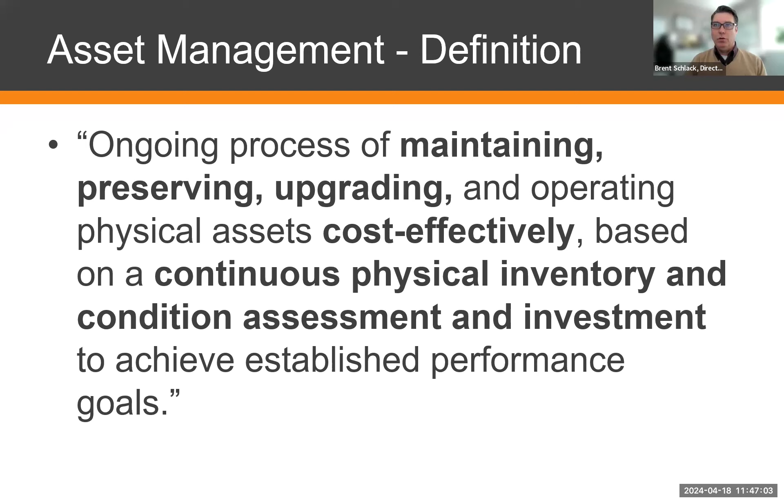By law—this was actually enacted in 2018, Public Act 325—it's regarding our asset management. That definition is the ongoing process of maintaining, preserving, upgrading, and operating physical assets cost effectively based on a continuous physical inventory and condition assessment and investment to achieve established performance goals. It's a mouthful. So you can go to the next slide, and then we get into our strategy.

Our strategy is we review our roads. We use what's called a PASER system, which rates our roads. PASER stands for the Pavement Surface Evaluation and Rating. It's a visual inspection—we have trained staff here that go out and visually inspect our roadways. We break that down into a good, fair, and poor designation. We've been doing this since the 1990s.

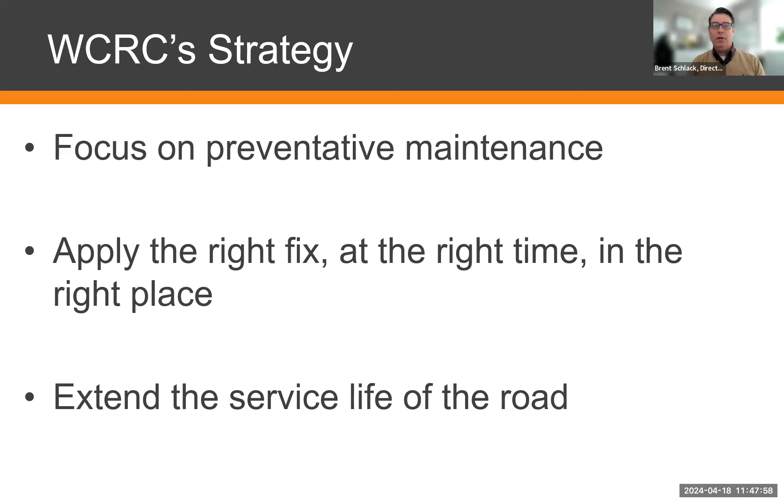We look at our primary road system every year, and our local roads are inspected every 2 years. Our strategy focuses on preventative maintenance practices, and we'll get into that a little later—Adam will touch on that. The goal of this is to apply the right fix at the right time and at the right place. We use that PASER system to help us, and the whole goal of this is to extend the service life. You can go to the next slide.

We like to relate this to changing your oil in your vehicle. Everybody can relate to a vehicle that owns a vehicle. That vehicle has a service life, and in order to extend that service life, we have to maintain it—through changing the oil regularly, changing your tires, and the same can apply to our roadway system. Roads typically last about 20 years when brand new, and our bridges about 50. It's a lot easier to perform preventative maintenance and invest in that, and it's less expensive than to do a full replacement.

If you can imagine, if you were to not change your oil in your vehicle or perform routine maintenance on your vehicle, it's a lot more expensive to replace that vehicle than it is to perform those preventative maintenance activities.

So now I'll hand it off to Adam, and Adam will get into our different preventative maintenance methods.

Thank you, Brent. Welcome to the 2024 construction season. We'll go into the next slide, and I'm going to talk about some of the 2024 projects that are scheduled.

Some of those projects include preservation projects, which involve preserving or protecting the existing surface of the road. We're doing resurfacing projects, which replace the surface that traffic drives on, and reconstruction projects, where we essentially remove and replace the base and surface material for the road. Then there's bridge projects, which include maintenance and replacement activities, and safety projects to improve safety characteristics of a road segment, plus some other miscellaneous projects throughout the county.

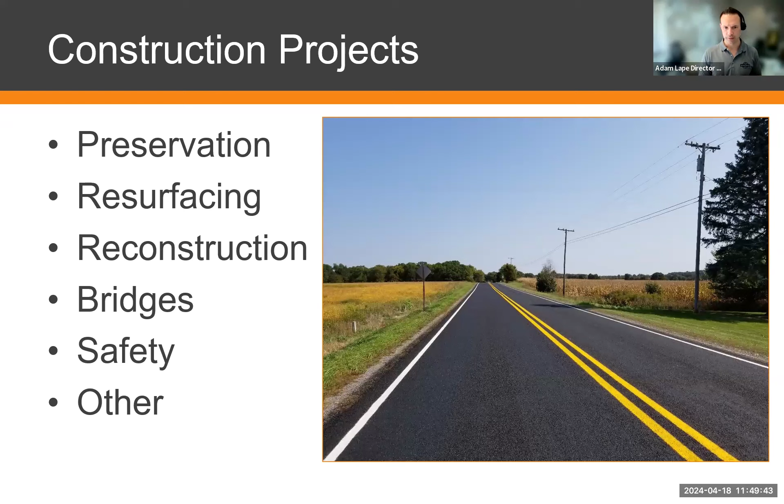Preservation itself focuses on taking care of pavement that's in good or fair condition. I'm going to talk about a few preservation tactics we use. The WCRC uses two types of preservation tactics: one being crack sealing, which is your initial effort after a road's been paved, usually 2 or 3 years later, and then seal coating, which is what you've probably become familiar with as the chip and fog seal portion of our project. I'll describe that a bit here.

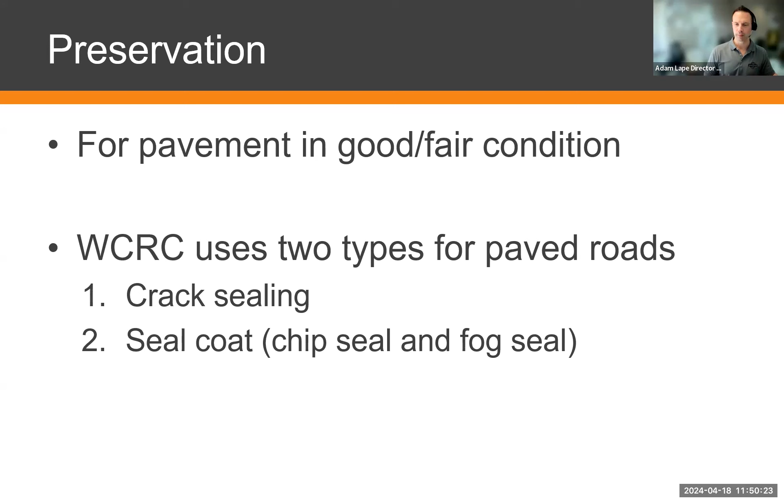Crack seal is used on relatively new pavement. You're just trying to seal the cracks that have evolved over the short life of the road, usually caused by freeze-thaw cycles. We apply an adhesive sealant into those cracks as our first effort to prevent moisture infiltration. You can see in the slide the black material applied there, that's the adhesive sealant used to seal the crack and make it waterproof.

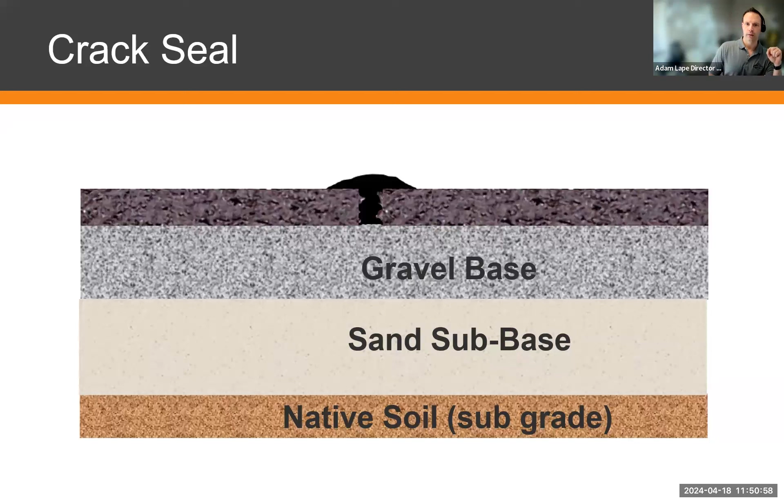Then, a few years after that, comes what we refer to as seal coat. There's aggregate, the gray stones on top of the asphalt, laid into a bed of sealing material. That material is rolled in and becomes a surface sealant to protect the entire road and make it waterproof. As you can see, the theme of a lot of our maintenance and preservation tactics is to eliminate moisture content. The aggregate is simply for traction for vehicles driving on that sealer.

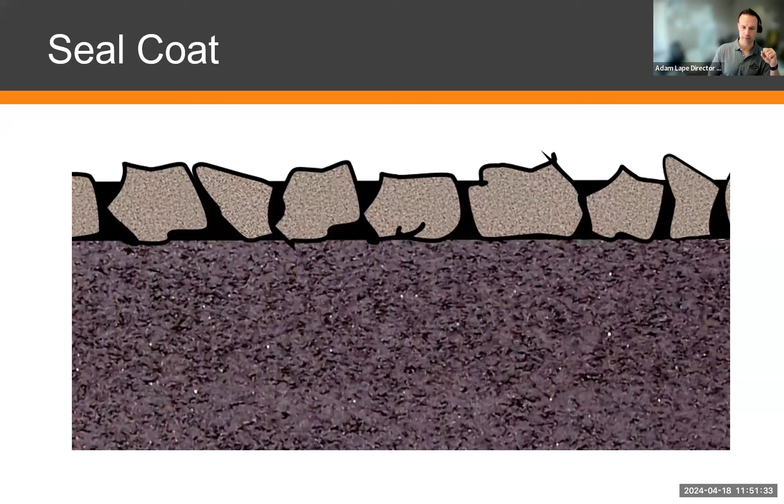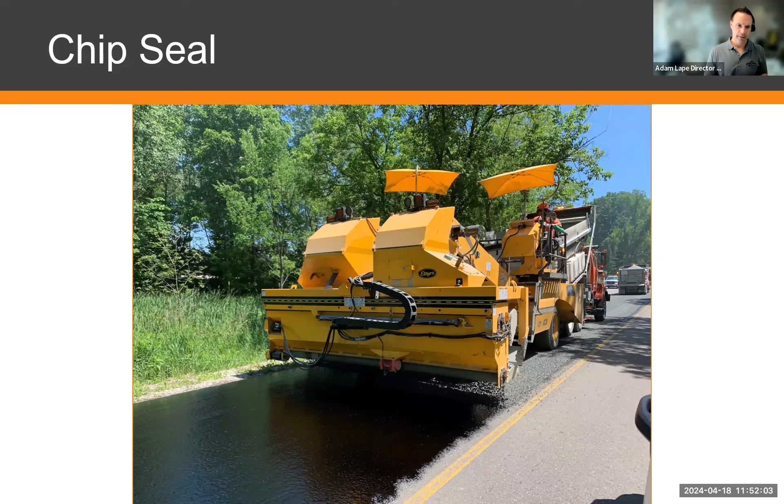In this next slide, you'll see our seal coat equipment, the chip seal machine, applying the actual chips to the sealer, which is the black liquid on the road. That spreads stones throughout the width of the road. Rollers come in behind to knead those stones down into the asphaltic material, similar to kneading bread when baking. Later, the WCRC will add advisory speed limit signs for safety, which we'll touch on later. It's eventually swept again within a week or so after we complete that portion of the project.

Once that's completed, usually a few weeks later, the crew returns for fog sealing. This sealer is applied to the surface stone to better lock it in, preventing stone loss and adding another layer of waterproofing. It's applied with a distributor truck, sprayed onto the road and given time to cure, then the crew moves on to the next section.

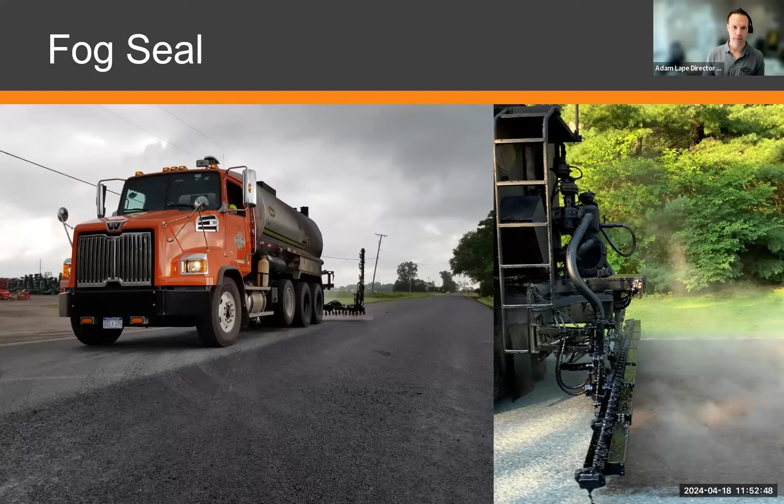Now I'm going to hand off to Aaron Berkholz to further explain some construction methods, where we really get into our engineering department and some of the practices they employ.

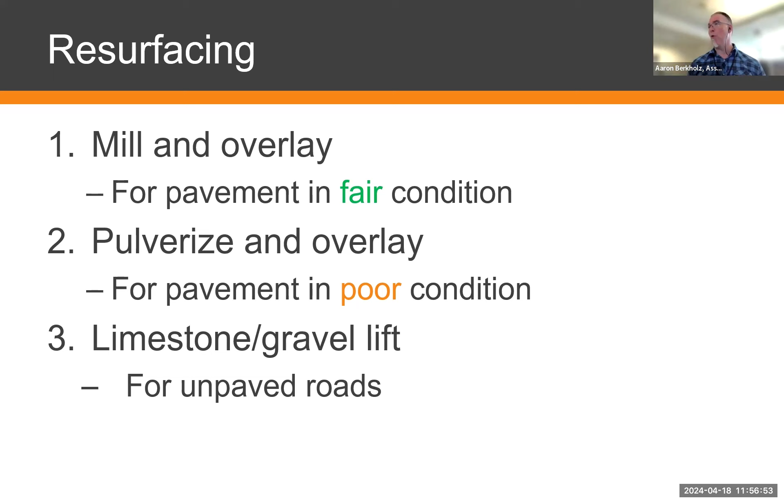Next slide, please. So again, the first process that I mentioned that we would use for resurfacing an asphalt road that is in good or fair condition would be milling and paving. So this just shows an example of what a mill machine does. And basically you've got a rotating cutting head inside the mill machine, and that basically is removing anywhere from usually 1.5 to 2 inches of that existing asphalt surface, and then that material is carried up a conveyor belt and loaded into a truck and then trucked away. So this is just a picture to help better explain that type of process. Next slide.

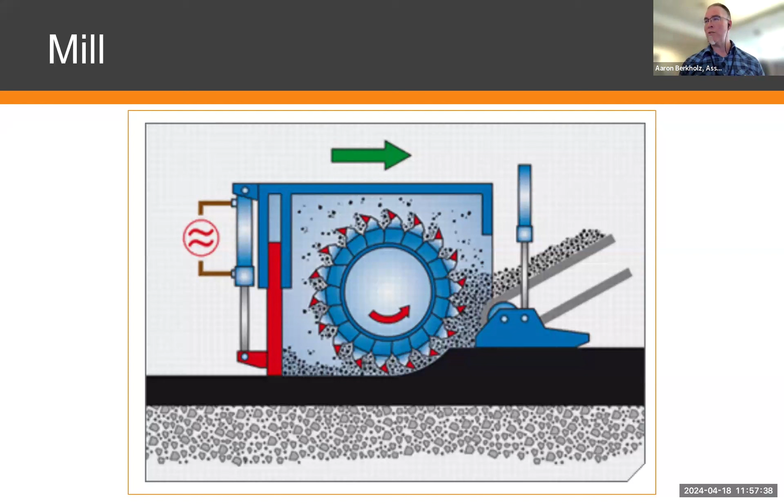And here you can actually see a mill machine in action. So again, that mill machine contains a cutting head, a cutting wheel, and as the machine tracks down the road, it's removing that existing asphalt wearing surface that you drive on, and it's taking that 1.5 or 2 inches of material, crushing that material up, and then carrying that into a truck for removal, for hauling away. Next slide.

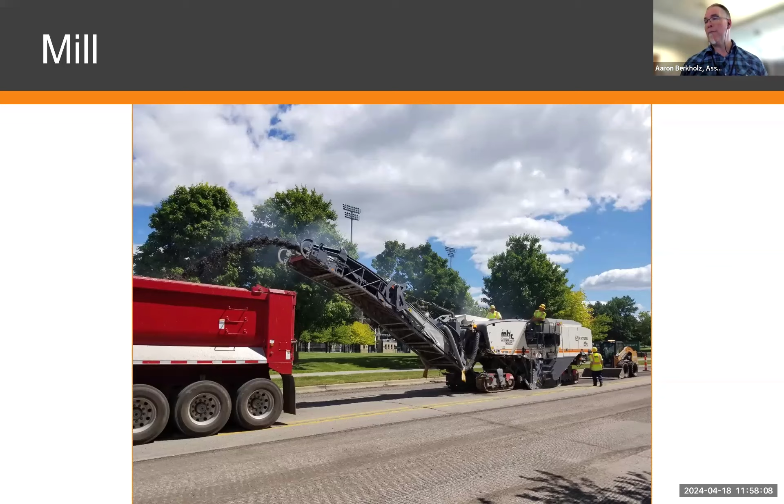And so this is an example of the second process that I mentioned, the pulverization and resurfacing. And again, I talked a little bit about a pulverizer. It appears similar to a mill machine, but the difference is that pulverizing machine retains the existing asphalt roadway material in place. It crushes that material up. It blends that material with the underlying aggregate base. Here it's labeled a gravel base, and it blends that material to provide a new base that then is resurfaced with asphalt. Next slide.

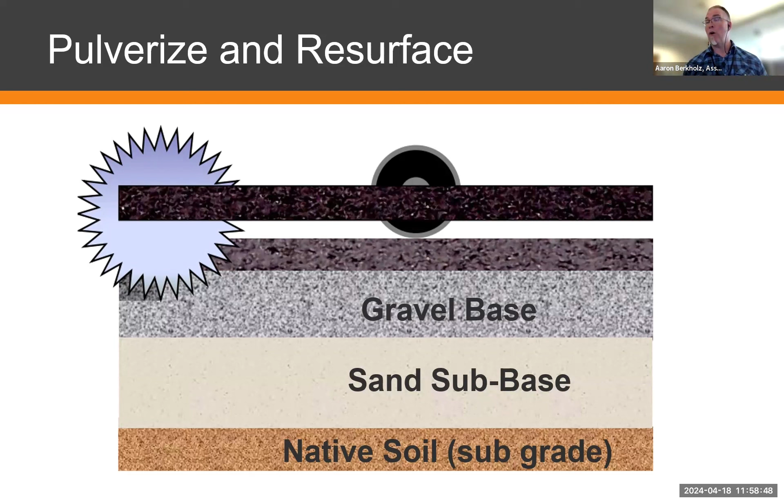And here's an example of a pulverizing machine. And you can see it does look quite similar. One of the big differences is you won't see a conveyor belt on a pulverizing machine, because as I mentioned, the material's not being hauled away, it's being crushed in place. And then once this material is crushed and blended by the pulverizing machine, then the contractor comes in and they grade the material and they compact the material.

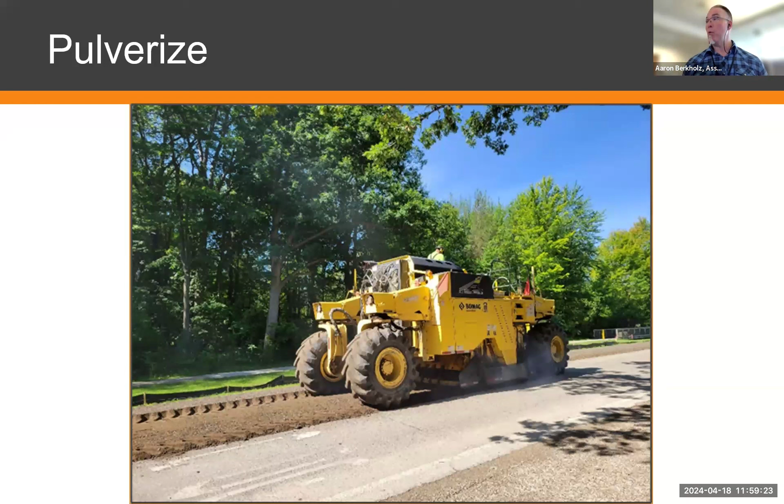And once it's been graded and compacted and the center line crown of the road has been restored, then we come in and we actually get the asphalt paving equipment in. And here's an example of that. So this is a milled road. So you can see the milled surface there that employee is standing on, and adjacent to that employee is the new paved surface, the new asphalt surface.

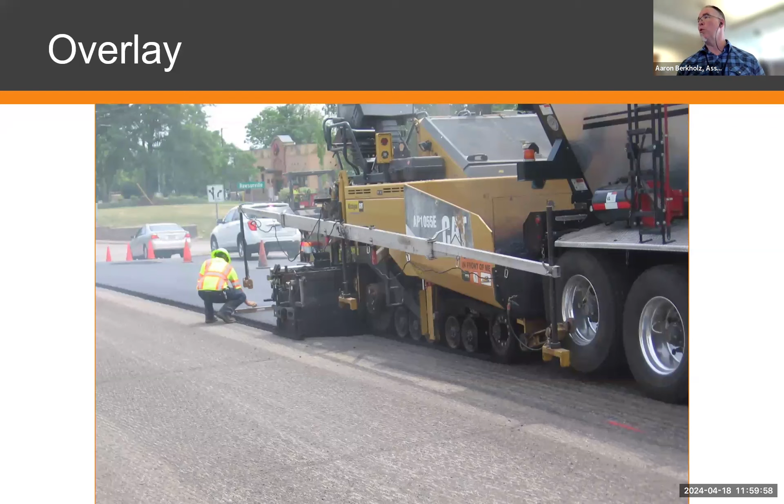And again, that surface generally will be 1.5 to 2 inches compacted in place. Sometimes we do mill deeper, and sometimes that's dictated by the condition of the road. But in general, it's 1.5 to 2 inches of material that's removed and replaced with new asphalt. Next slide.

And the third type of operation I mentioned is specific to our unpaved road network. And again, we have several hundred miles of unpaved roads in the county. Some of those roads are primary county roads, and some of those roads are local county roads. But again, those unpaved roads are improved through resurfacing with new aggregate, with new stone. We use a couple different types of material for this soft surface resurfacing. We use gravel and we use limestone.

Oftentimes it depends on the type of material that's already in place on a road. Generally, if it's a gravel road, we stick with gravel. If it's a limestone road, we stick with limestone, but not always. And this material is placed. Then the material is graded, again, to restore that crown to the road, because what that crown does is it provides drainage off of the road. So we always want to establish a good crown on the roadway to convey that storm water, that surface water, off to the edge of the road.

And oftentimes, as part of our unpaved road improvements, we do things like drainage improvements. We may restore ditches. We refer to it as berming the road. We may remove the built up material that's along the edge of the road, again, to allow that surface water during rain events to be conveyed off of the road. And then oftentimes we'll do forestry operations. We may come in and limb trees. We may come in and remove trees. But again, all of this is contributing to the longevity of that investment, improving that unpaved road. Next slide.

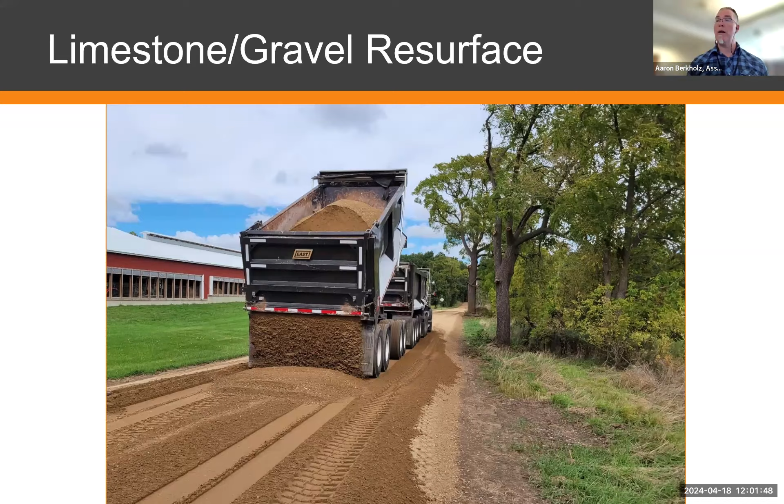And so for the upcoming season for 2024, we plan on resurfacing, so asphalt resurfacing, 30 miles of road. And then we plan on resurfacing our unpaved or soft surface roads, about 11 miles of that. And again, using those different types of material for that effort, using the limestone and the gravel.

The money comes from a variety of sources to realize these infrastructure investments. And that's federal and state fuel taxes, the county road millage, which we're very thankful for. We appreciate the public continuing to support that county road millage. And then we have great township partners, and the townships will often partner with us to invest township funds to improve roadways. So again, we do have a variety of sources that are used to realize these investments. Next slide.

So again, to review some of our resurfacing projects for the upcoming season, we're going to be pulverizing and resurfacing a portion of 7 Mile Road in Salem Township. We've got Bemis Road in Ypsilanti Township, and actually that's a township line road. So Bemis Road between Stony Creek and Hitchingham Road, the northern side of the road is Ypsilanti Township, and the southern side of the road is Augusta Township, but we're going to take that unpaved road and we're going to pave it. So that's a full reconstruction of the road.

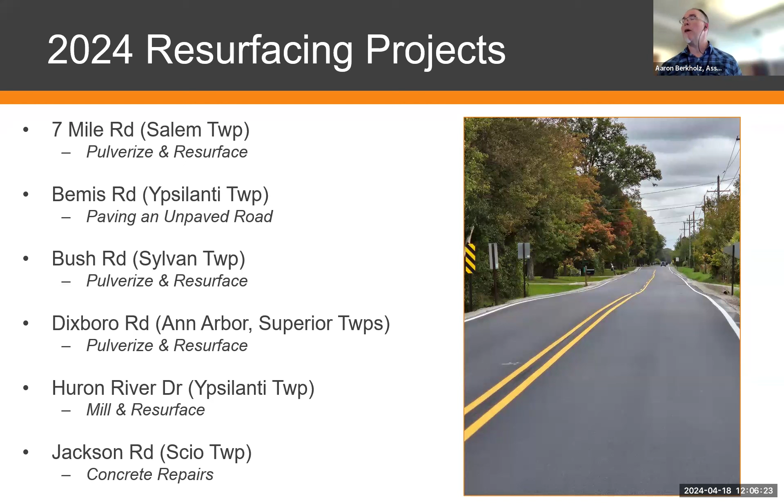And then here's some of our additional projects. Again, we've got quite a lengthy list of projects we're going to be working on this year. Joy Road in Ann Arbor and Northfield Townships. So that's a limestone resurfacing project. And again, it is a township line road. That one actually is ongoing. That's underway. There's been some forestry work performed on that project, drainage work performed on that project. And as I mentioned before, performing that drainage and that forestry work is vital to promoting the longevity of that new surface, that new limestone surface to be placed on Joy Road.

So that's ongoing. We've got Miller Road in Scio Township, a relatively short section of Miller Road that's from the roundabout at Miller and Wagner and extends east towards the city of Ann Arbor, actually to the M-14 ramps, or the M-14 service drive, if you will. So we're going to be doing a milling and resurfacing of that road.

We've got Parker Road, again, another township line road between Lima and Scio Township. We're going to be pulverizing and resurfacing that road. Operations, again, I mentioned the forestry and the drainage work. That work actually is getting started here. So our intention is working with our operations team here at the Road Commission. They're performing that drainage and forestry type work to prepare the project for pulverization and asphalt paving that would be performed by one of our contractors.

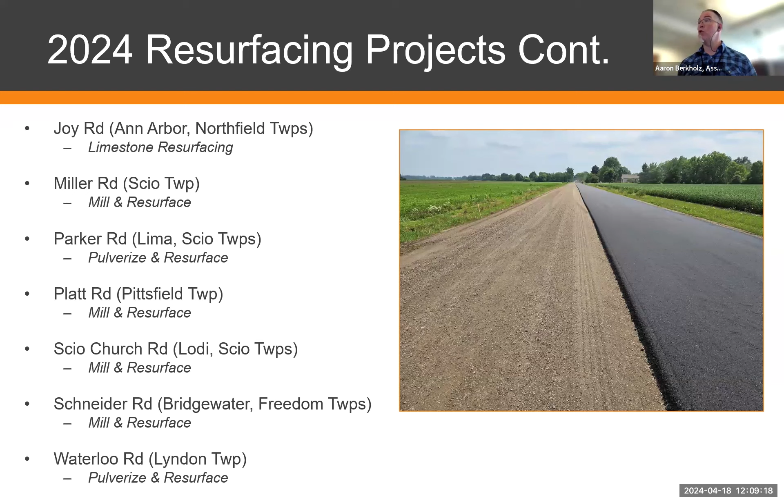We've got Scio Church Road. Again, many of these are township line roads. So Scio Church Road between Lodi and Scio townships. That's a mill and resurface project. We have Schneider Road down in Bridgewater and Freedom. That's a mill and resurface. And then we have Waterloo Road in Lyndon Township, and that's going to be a pulverize and resurface as well. So a wide variety of infrastructure investments and improvements to look forward to this season. Next slide.

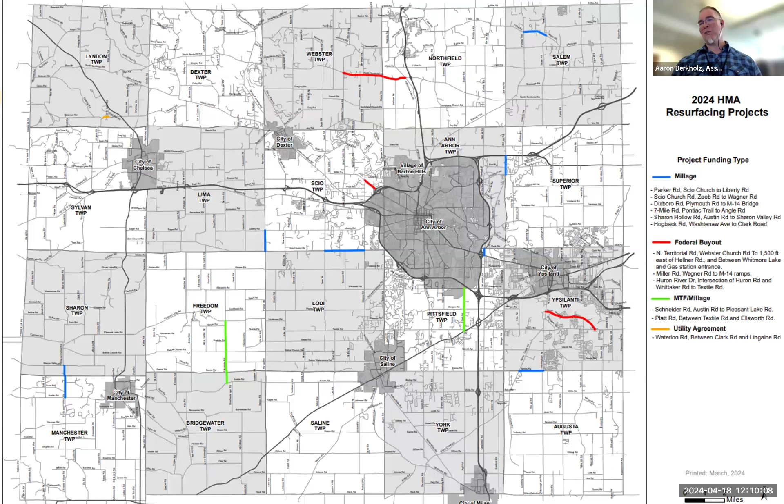I very much look forward to the upcoming construction season. We're going to build a couple of roundabouts this season, so that's exciting.

We have an ongoing project that just started this past Monday, April 15th. Our contractor closed the intersection of Miller Road and Zeeb Road, and the project work is now ongoing. This intersection is closed, and we have posted detours directing traffic around the closure. The intention is to build a roundabout here, with the focus being to improve primarily the safety of the intersection, and also to improve the efficient movement of traffic and the level of service for motorists using it.

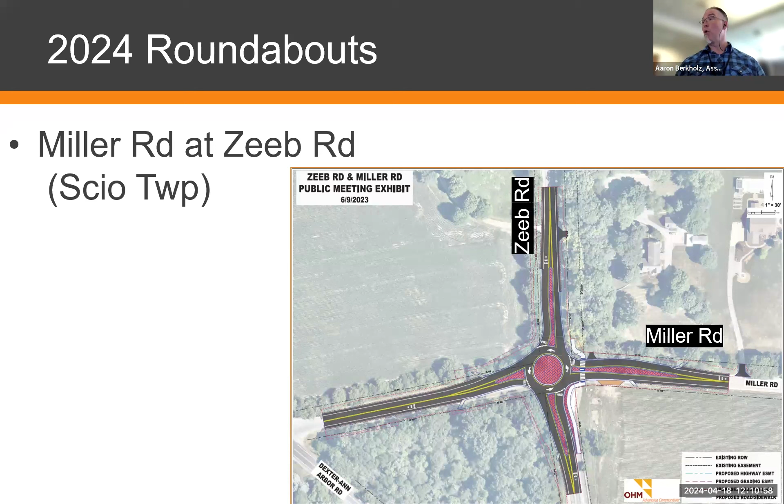This is another roundabout. Our second roundabout for this season is down at Whittaker Road and Willis Road in Augusta Township, immediately adjacent to the Lincoln Consolidated Schools campus. We do have a contractor in place; in fact, the pre-construction meeting for this project was just yesterday.

The intention is to close the road in early June. The first two weeks of the closure, we're allowing DTE Gas to move in, as they need to relocate gas mains for us to build this proposed roundabout. We've given them a two-week window. Our contractor will then commence operations and begin construction of the new roundabout. We've indicated in our contract and bid documents that this is to be completed prior to school going back in August.

One of the things that often happens on a construction project is that certain factors influence the schedule, such as weather. If a contractor experiences poor weather for an extended period, they can request an extension of contract time. If they justify that time and we agree it's justified, then we grant it to them—but they have to provide that justification.

Something else that sometimes occurs, try as we might, is unexpected utility conflicts, because sometimes utilities are not effectively identified during the design process. Sometimes it takes additional time to work around a utility or with one of our utility partners to get a relocation performed. We try as much as possible to hold our contractors to the schedule dictated in the contract documents, but there are justifiable reasons we sometimes consider if they request such.

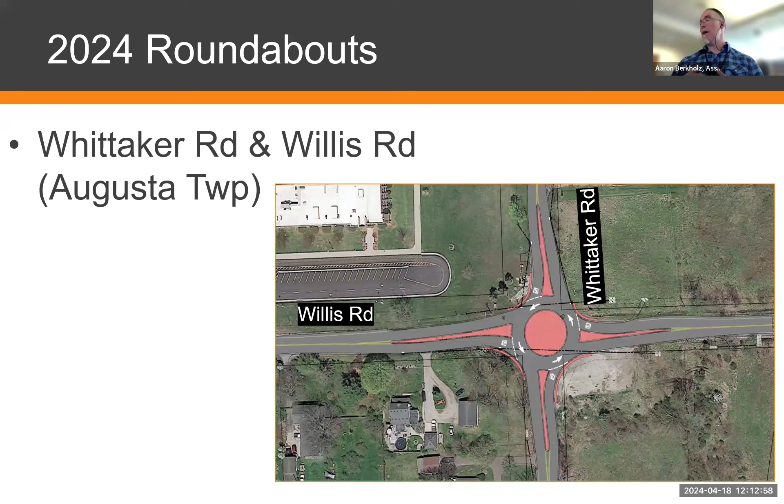The Road Commission has direct jurisdiction over 125 bridges throughout the county, in a variety of conditions. Those bridges are listed by the federal inventory. Not to get too far into the weeds, but what is considered a bridge by the Federal Highway Administration and by MDOT is a structure with a span greater than 20 feet.

For instance, you can see the bridge in this picture—this is the Dixboro Road Bridge over the Huron River, with a span well in excess of 20 feet. No one would question this being a bridge, but sometimes our bridges are quite small, maybe only 20 feet, measuring the portion that spans over the waterway from one foundation to the other. If that span is 20 feet or greater, then it's a federally listed structure.

Federally listed structures have to be inspected at a minimum every 2 years, but if the structure falls into a state of advanced deterioration, we inspect it more frequently. If a structure has a weight limit on it, that's another indication of structural deterioration, and we inspect that bridge more frequently as well.

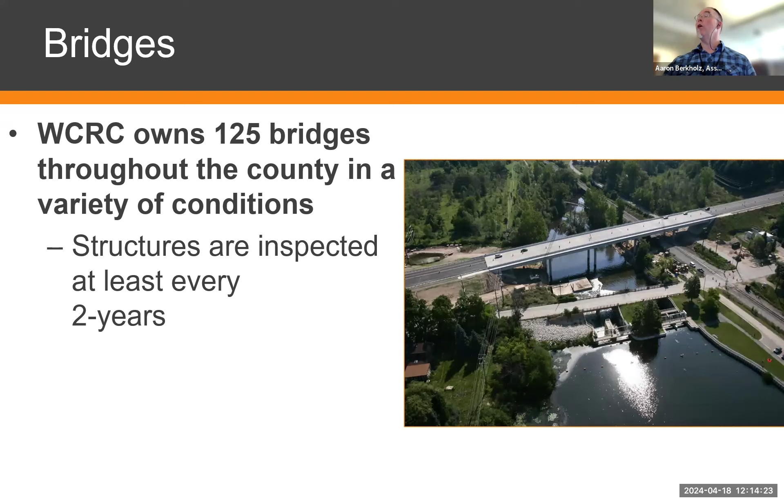One of the bridge replacements we're going to undertake this year is on Stony Creek Road over Paint Creek in Ypsilanti Township. As indicated on the map, that bridge is located between Whittaker Road at the north end and Textile Road to the south end. It's immediately adjacent to the Pineview Golf Course, and our intention is to begin this project in late July.

Our contractor will close the road to perform this work, and the existing bridge will be removed and replaced with a new structure. The fortunate thing here is that the detour route is quite short, which supports the closure of the road—generally for a bridge project, it's far more efficient to replace a bridge by closing the road. So we're taking advantage of the relatively short detour: motorists can simply follow Whittaker Road to Textile and then right back over to Stony Creek Road. That's not a very long detour at all.

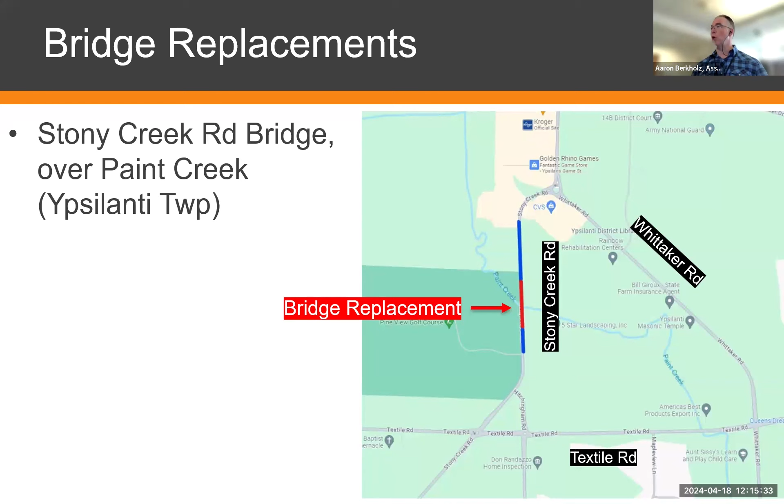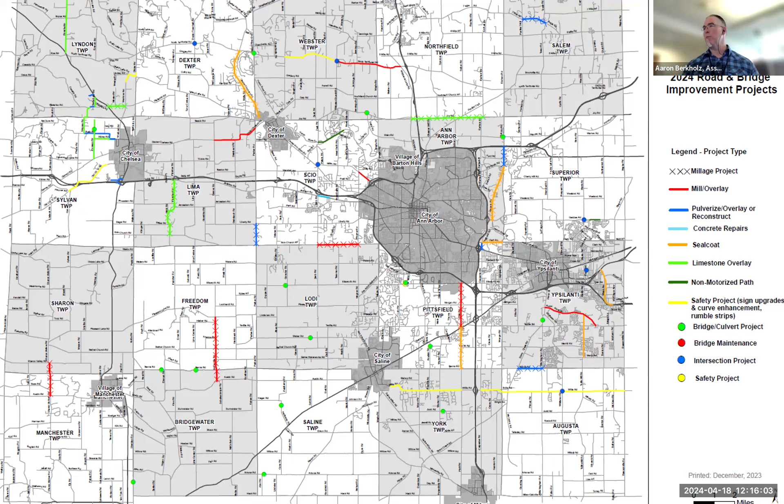Again, touching on the map and the variety of projects we have, this map goes over the wide variety of project investments we intend to undertake this year. I really want to stress that it's of great value if the public has interest in projects to go to our website—we have a plethora of information available there for people to learn about our work.

I provided just a quick tutorial on bridges. If you have a structure under a 20-foot span—that span being from one foundation to the next, whatever spans over the waterway—if it's under 20 feet, that is deemed a culvert. We actually own 2,800 plus culverts throughout the county. There are a variety of sizes and conditions, and the larger structures are inspected at least every 4 years. The bridges, we have to inspect at minimum every 2 years, as dictated by Federal Highway and MDOT.

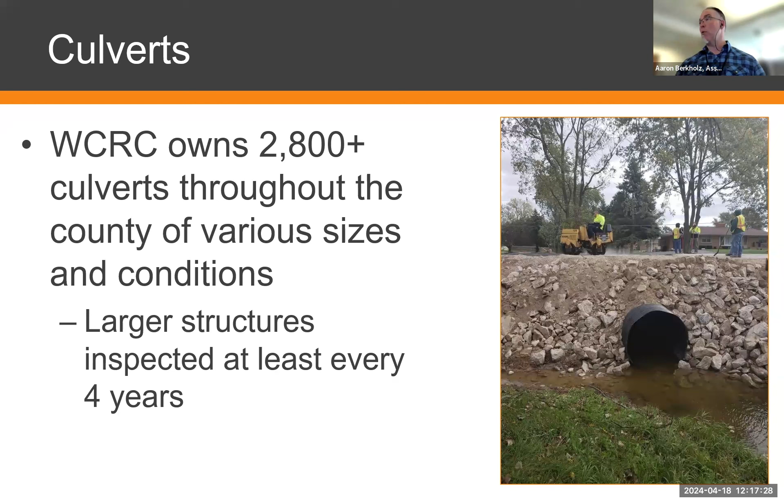The culverts are left up to the road agency, those under our county roads. We've undertaken a program at Washtenaw County to make sure we're inspecting the larger culverts—those 5 foot in span or greater—every 4 years at minimum. There are a wide variety of culvert types, and we oftentimes work with our township partners if they're on a local county road, to undertake those culvert improvement projects.

We do have quite a few culvert replacements this year. I'd like to note that part of the funding for this year's projects was provided through the Washtenaw County Board of Commissioners working with the Water Resources Commission to provide a stormwater quality grant program. The road commission worked with our township partners, and that grant funding has been identified in many cases for culvert replacements to improve stormwater quality.

Again, many projects to be undertaken this year: Arkona Road in Saline Township, Bemis Road in Bridgewater and Freedom Township, Conway Road in Sylvan Township, Ellsworth Road in Lodi Township, Feldkamp Road in Saline Township, and Fosdick Road in Pittsfield Township—again, working with our township partners, in many cases through the Water Resources Stormwater Grant Program.

These types of projects, 9 times out of 10, require a road closure. Again, for the same reasons as with the bridges, it's far more efficient to close a road to replace a culvert. Oftentimes the culverts we're replacing are in such poor condition that we really could not maintain traffic on half of that culvert, so by and large, culvert replacements require a road closure.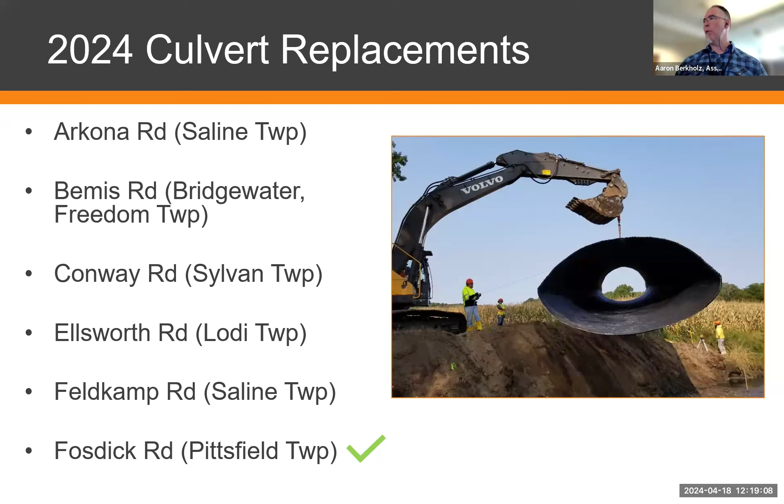Here are quite a few additional culvert replacements on Huron River Drive, Joy Road, Judd Road, Oak Valley Drive, Sheridan Road, and Weber Road—a wide variety of types of culvert replacements and a great deal of work here.

But all of this is for the betterment of our county road system, because while a culvert might not be of significant size—could be as small as a 5-foot span—if that culvert is in an advanced state of deterioration and inspection determines it has to be closed, it can be a great impediment to the traveling public. So it's very important, regardless of the size of the culvert, that we're attentive to that and that these investments are made.

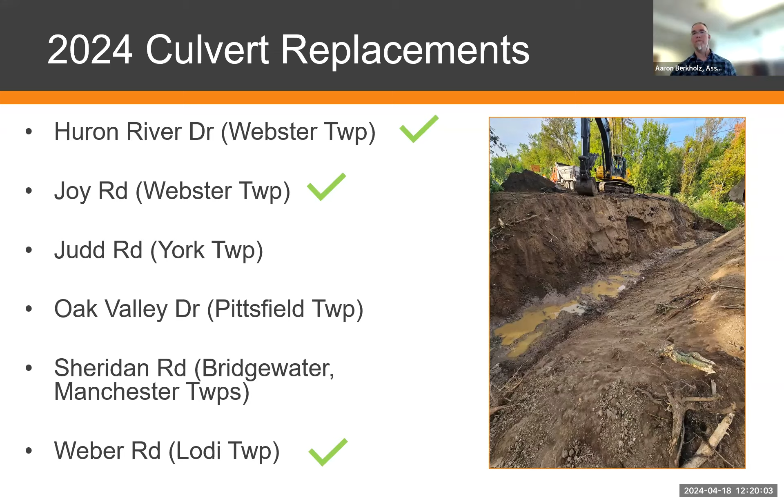So we do have non-motorized projects as well. We're happy to partner with Washtenaw County Parks and with our township partners. One of the ongoing non-motorized projects that we're part of the team on is the Huron River Drive Segment D3 project.

The D3 project extends from Zeeb Road at the west end along Huron River Drive to East Delhi or Delhi Metro Park at the east end. That's going to create a non-motorized trail that'll run along the south side of Huron River Drive, between Huron River Drive and the adjacent railroad.

As we construct that non-motorized path, one of the challenges we have is constructing a bridge to cross over the Huron River. I'm happy to say that bridge construction is ongoing. Our intention is to work with Washtenaw County Parks and with the contractor to complete that project during this construction season.

There have been some great challenges on that project that have extended the timetable, and one of the biggest challenges we had was working with the railroad. Not to speak ill of our railroad partners, but there are various permits and requirements put in place by the railroad, and we needed to work with them to overcome those challenges.

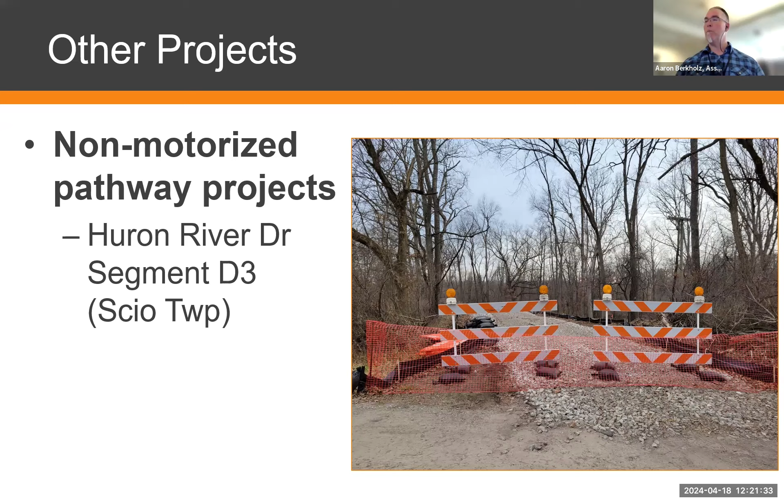So next slide, please. I'll go ahead and turn this back over to Brent, and he's going to touch on our traffic and safety. Thanks, Aaron. Now I'll get into our traffic and safety.

A lot of the projects that were either started through grants or that are maintained or performed under this group - if you go to the next slide - a lot of these projects will include traffic signals, either new signals or upgrading or modernizing existing signals, or have some flashing beacons. There's a variety of sources of funding, whether federal, state fuel taxes, or through the county road millage, or partnering with our townships.

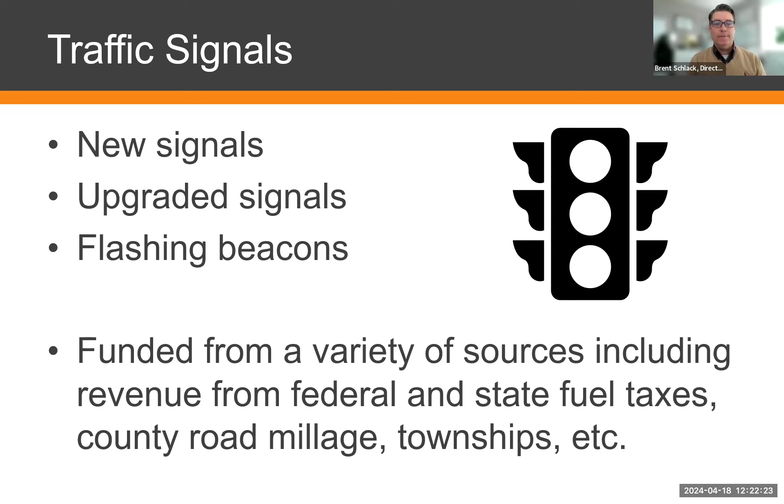If you can go to the next slide. So some of the new traffic signals - these were carryover projects. They were actually funded last year, but due to some material delays we had to carry those over into this year. Those include Ellsworth Road at Oak Valley Drive. This was actually a millage project, partnering with Pittsfield Township to improve this intersection with a mast arm traffic signal.

Another one is in Superior Township - this is Geddes and Harris Road. This will get a box span traffic signal that'll be installed by our crews.

Webster Township - this is actually part of a safety project that I'll touch on a little bit later. This is at North Territorial and Webster Church Road, where we'll be widening that intersection to put center left turn lanes and ultimately installing a brand new traffic signal.

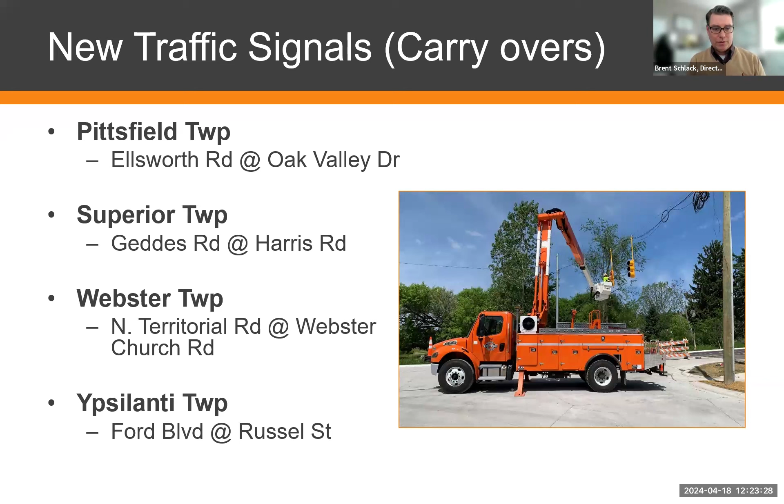Ypsilanti Township, this is Ford and Russel. This is actually to modernize this intersection from the existing diagonal span to a mast arm traffic signal. If we can go to the next slide.

So then we get into modernizations. A lot of the projects listed here were applied for through a Congestion Mitigation Air Quality grant that monitors the air quality, and we apply for those and receive funding to modernize those to help reduce CO2 through these segments of road.

First one is in Pittsfield Township, and actually this does extend into the city of Saline. This is along Ann Arbor Saline Road between Maple and I-94, in Pittsfield Township. And then Maple Road, which extends within Pittsfield and into Saline, between Ann Arbor Saline Road and US 12. This will be modernizing those signals so that they communicate, and we're able to monitor that traffic actually from our office.

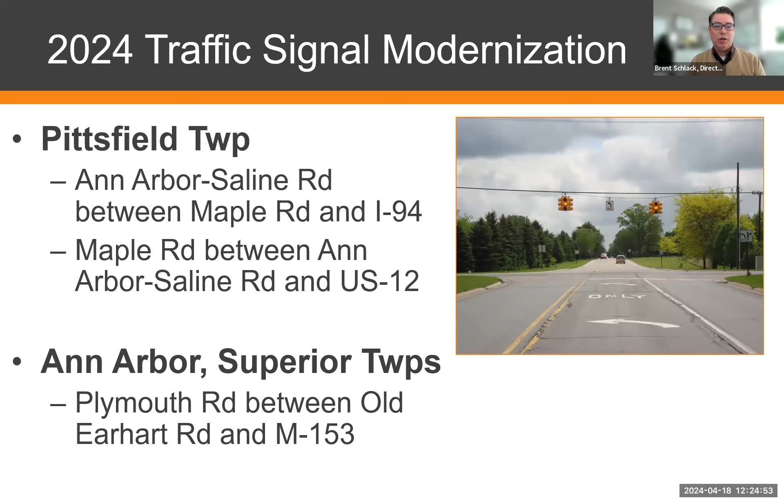The next project is within Ann Arbor and Superior Townships. This is along Plymouth Road, between Old Earhart and M-153. Again, this will be to modernize those signals along that corridor, and actually that includes an adaptive system that will then adjust that signal based on the demand of traffic that it's seeing. You can go to the next slide.

Then we get into some of our safety projects. Our traffic and safety group monitors our roadway system and then determines whether or not specific treatments need to be put in place, whether that's a center left turn lane or enhanced pavement marking or signage. And then we also look to utilize some of that to apply for safety grants. Unfortunately, these are reactive grants and they're looking at existing crashes, but we want to put these in place to help improve whether that's an intersection or a segment of road.

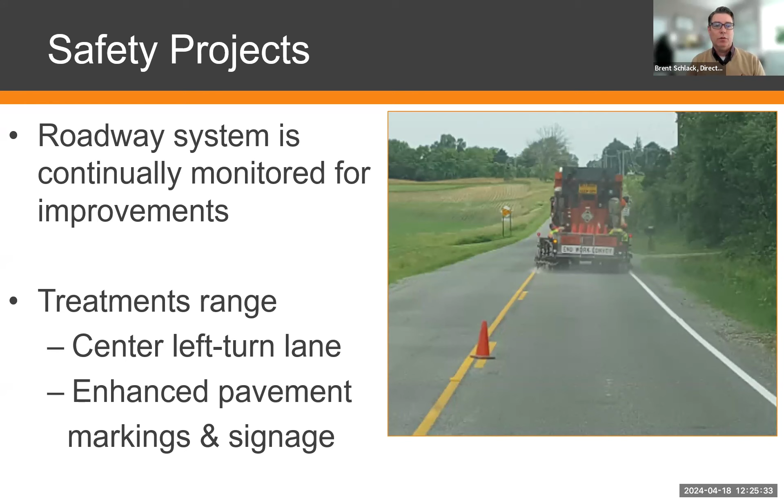Through some of those grants we received, we're putting in a new traffic signal as a safety project along North Territorial Road. That project extends from just east of Webster Church Road to Mast Road, and includes the traffic signal at North Territorial and Webster Church Road, adding center left turn lanes at that intersection. There were also a couple of culvert replacements on that corridor, plus rumble strips and sign upgrades. This is funded through our safety grant, not the congestion mitigation program.

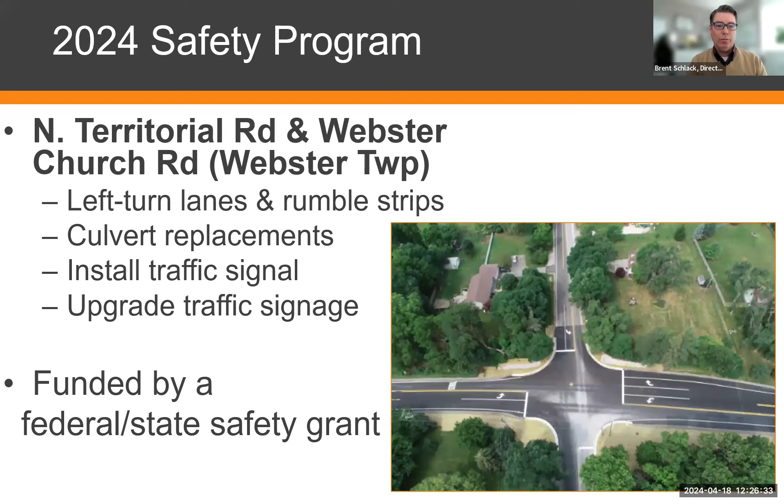Also through those safety funds was North Territorial and Dexter Town Hall. And just to back up, the project along North Territorial from Webster Church to Mass began this past Monday, April 15th.

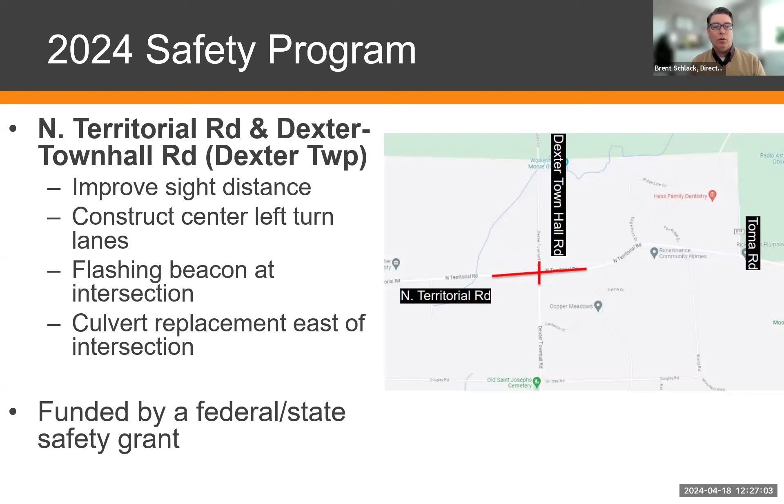The project that's ongoing is on North Territorial at the intersection of Dexter Town Hall. This was to improve the sight distance of that intersection by cutting that hill down over 6 feet. We'll also be constructing a center left turn lane at the intersection, installing a flashing beacon there, and there was a culvert replacement east of the intersection.

One other safety project we just recently bid out through MDOT, also through their safety grant program, includes Old US 12, Werkner Road, and Willis Road. This will look at applying high friction surface within the horizontal curves of some of those roads. Centerline rumble strips will also be added, with Willis Road getting them basically from the city of Saline all the way to Rawsonville Road. Those were funded through the safety grant.

Now I'll pass it off to Adam and he'll get into our road maintenance. Thank you, Brent. We'll talk a little bit about road maintenance now.

Some of the items we highlighted earlier really focus on preservation of the roads. That's what we do every day on the maintenance side of operations that I oversee. Typically our work is performed as needed when resources are available. We acquire field information and current conditions from both our staff and the WCRC Fix-It request app. General surface maintenance, including pothole patching and grading of unpaved roads, occurs throughout the year when applicable, mainly weather related.

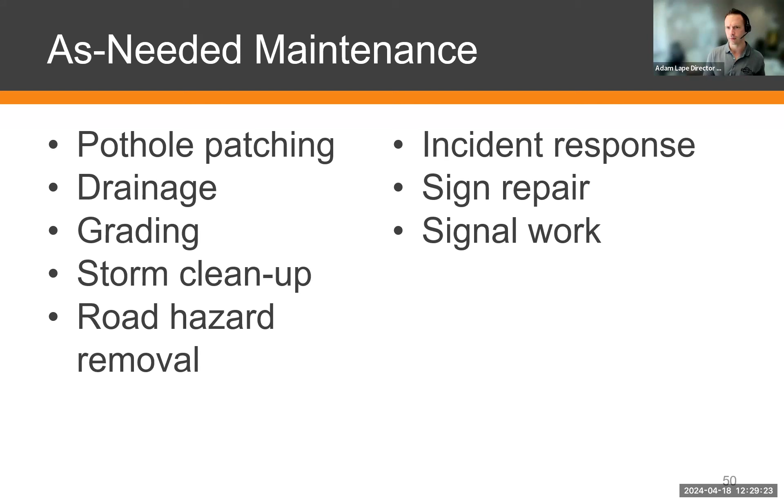The engineering department also has staff that perform necessary maintenance for traffic signs and signals, which Brent touched on a little bit. These are both emergent incident response and routine maintenance-based practices.

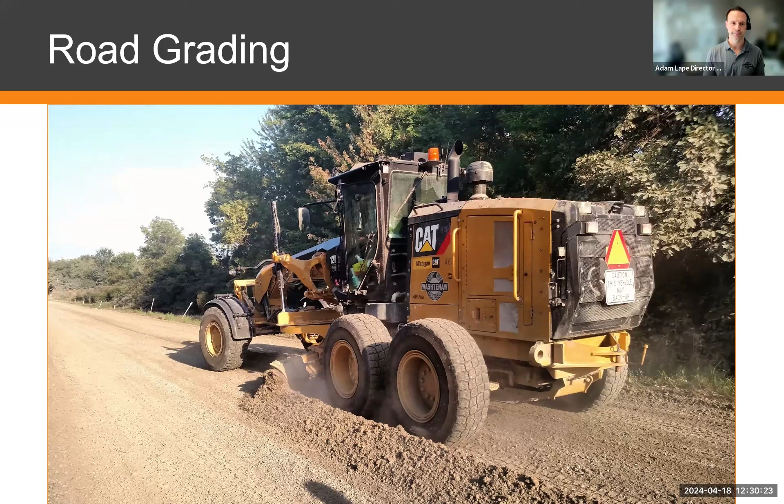For scheduled maintenance, that work's performed on a seasonal schedule. It's not by request, but our team schedules that out throughout what they can accomplish each week, month, throughout the year.

Dust control, that's dust suppression, to limit material loss, because fugitive dust turns into the fine particles leaving the road, which are actually what we use to keep the road compact. So that essentially degrades the road when it's dusty. Within the summer months, we try to make at least 3 applications of dust suppression throughout the season, typically scheduled to span the season and limit that dust as best as possible. Both primary and local roads will get those multiple applications.

Roadside mowing is something you frequently see. You may drive past it and not realize it, but that's a typical 5-foot swath along the edge of the road that's mowed to keep back weeds and brush. It also provides a bit of space as a safety cushion or buffer, so traffic can see a potential animal that decides to cross at any time of day, particularly in low light hours.

The county paved road system is mowed twice per season, usually at the beginning and then sometime mid-season towards the end. The unpaved county road system is mowed once per season, typically mid-season, so you can think July to September, somewhere in there.

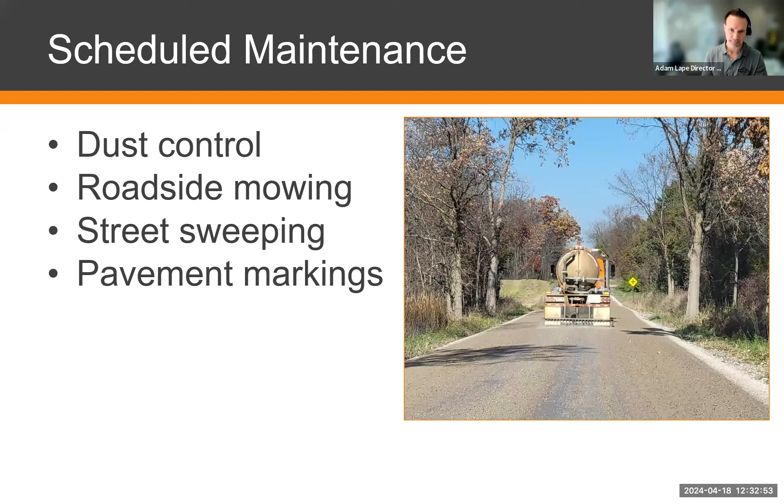Scheduling is relatively simple, but it does get a bit complex as you move through the season. It's a good time to answer the question about springtime - we hear, why haven't you started the project yet? A lot of these, as you heard, have restrictions, whether environmental or weather specific. When there's too much saturation, it's tough for the contractor or our crews to begin some of these projects.

Really what you need is a dry road bed - that's the surface the road is basically sitting on. If that's saturated, you don't have stability. In addition to that necessity, those environmental restrictions really play a part in our scheduling, and we really have to coordinate that to try to do as much as we can.

Off-season projects are possible with favorable winter conditions. Some of those culvert replacements for 2024 occurred this winter in theory because the frost wasn't as thick, or even present in general, so materials and crews were available. We were able to do some of the more simplified culvert replacements to limit impact on the traffic system throughout the summer months. As we all know, Michigan provides us a shorter construction season compared to many states, so we really try to make the most of it.

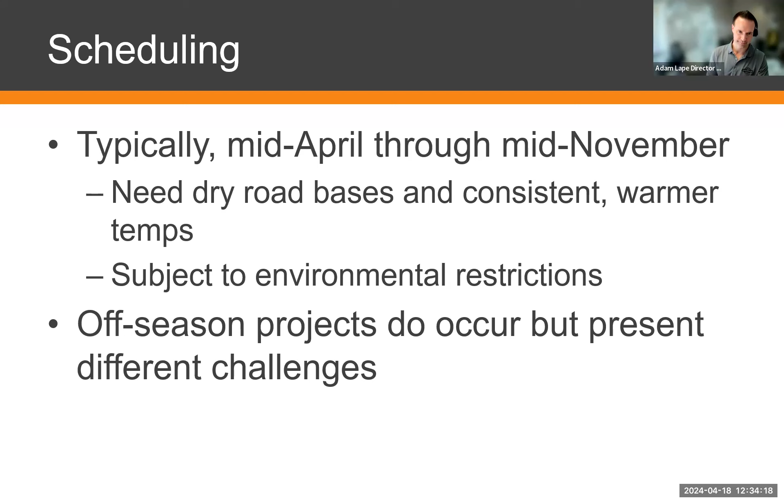This slide highlights construction activities, which are very much weather dependent. As we've been saying, a moisture delay can affect whether it's an unpaved or paved project. An example would be the seal coating we spoke about previously with the chip and seal - none of those sealers can be applied when it's wet, so if rain comes, we essentially have to stop. Paving is also something we really can't do while it's raining. You don't get the specified adherence between layers of asphalt, and you also run the risk of increasing safety risk to the crews performing that work in hard visibility areas.

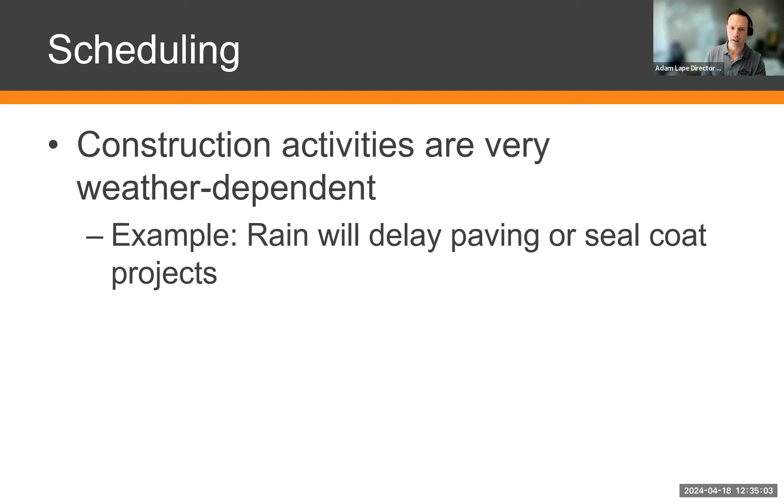Then a little complication comes in with all the moving parts we have. We've highlighted environmental considerations continually throughout the presentation, but we also try to coordinate with MDOT, as Brent noted before, and so did Aaron. That's very much dependent on some of our projects, how we work, because we have to work with MDOT to ensure we're not putting traffic onto one of their jobs or vice versa. So there's quite a bit of coordination between ourselves and MDOT to maintain that.

But some other potential project delays that could be considered would be utilities, whether it be relocation or just working with utilities in general. We talked a little bit about the rail system. Sometimes permitting is specific to certain times of the year that we can work. So really just that coordination and continued communication that our team works on kind of behind the curtain.

And then some of the equipment we actually use can break down and cause a bit of a delay as well, because they don't make as many pieces of that equipment. They're really very much specialized, so you have to kind of take care of what you have. And then supply chain is sometimes a challenge. Previously, it's bothered us quite a bit. Things seem to be leveling out here in recent years.

And then I'll give it back to Aaron to talk a little bit about work zone safety, and I'll speak a little bit later. Thank you. Thanks, Adam.

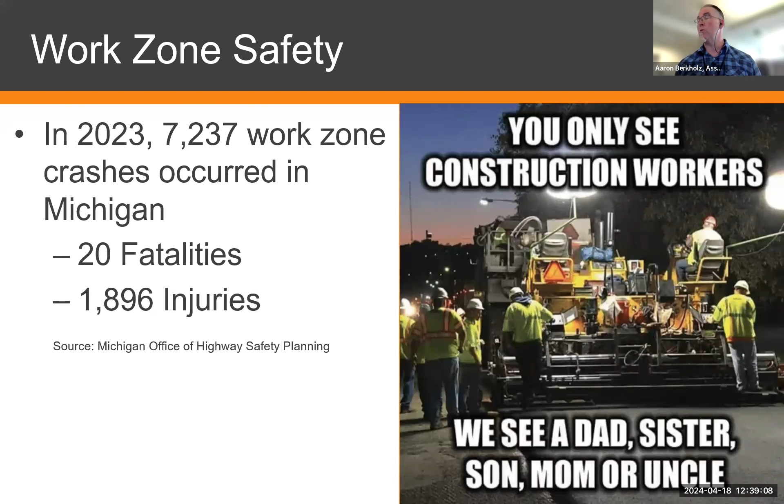So work zone safety includes slowing down and minimizing your distractions. There are a variety of distractions in our vehicles now. Most vehicles now come with more or less a video screen. But again, you need to be paying attention, you need to be patient, you need to exercise caution, and you need to be calm, because it can be very frustrating.

And please understand that all of us that work here at the Road Commission get caught in the traffic as well, because we travel as part of our workday. We travel off work hours with our families, and it can be quite frustrating. But again, we're asking everyone to remain calm, keeping in mind that the work that's going on is a relatively short-term disruption for a long-term investment in our infrastructure.

As an example, I mentioned the work that's going on at Miller and Zeeb right now to construct the new roundabout. We have indicated to our contractor in our bid documents that they have 9 weeks to get that intersection reopened. 9 weeks is a relatively short period of time invested for the construction of a roundabout that will serve the public for decades to come. So next slide.

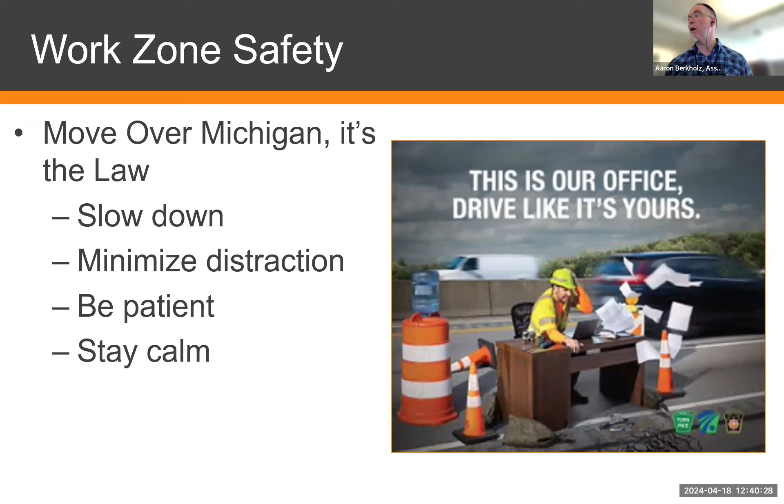And again, what I've seen during the course of my career is, again, motorists being willing to press their luck and to risk injury to the workers on the job site by ignoring closures. I've seen individuals drive around barricades. I've seen them drive through ditches. I've seen individuals stop their vehicles and get out and move barricades to be able to drive into the closure

zone. The closure zone is very hazardous. It's hazardous for the motorist. It's hazardous for the workers on the job site. And again, we are asking that people be respectful. When we put a road closure up, we mean the road is closed. Next slide, please.

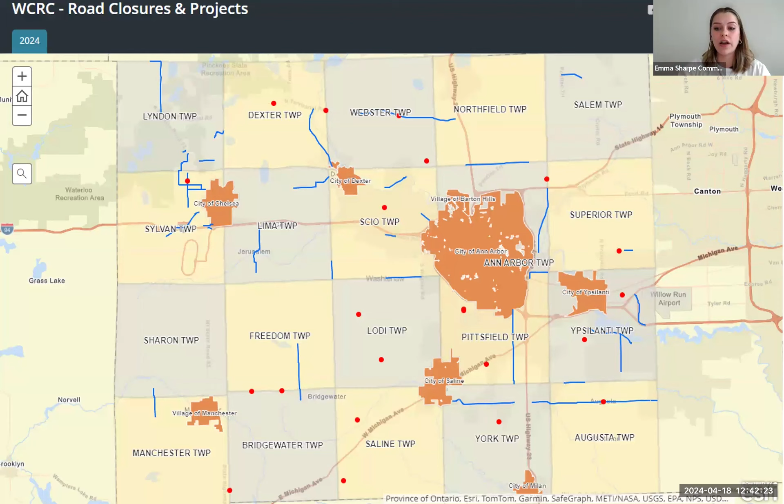Every Thursday, WCRC posts a weekly roadwork schedule for the coming week to give residents an overview of the traffic impacts that they may come across throughout the county. The schedule includes our major construction projects as well as local road projects. However, the schedule does not include routine maintenance activities such as pothole patching. Please keep in mind that the schedule is subject to change after publication based on weather conditions, crew availability, and contractor scheduling.

Now, while we're talking about the schedule and the website, I want to take just 1 second and direct you guys over to our website and show you guys how to find the information that you're looking for. So I've just opened a regular browser and I've typed in WCRoads.org. Once you get to our homepage, you'll be able to see just an overview of the latest updates that we have. We have project updates over here. This is normally where our road advisories will be. And you can click on the interactive map here.

At the top, there's going to be a menu bar. One of the options is going to be roadwork and construction. Once you hover your mouse over that option, there'll be a drop-down menu, and one of the options you can click on is current projects. If you go to our current projects webpage, you'll be able to see the interactive map that takes just a second to load. At the top of the page is where the recording for this meeting will actually be posted. So if you need to go back and watch this meeting for any reason, you can find it at the top of the page there.

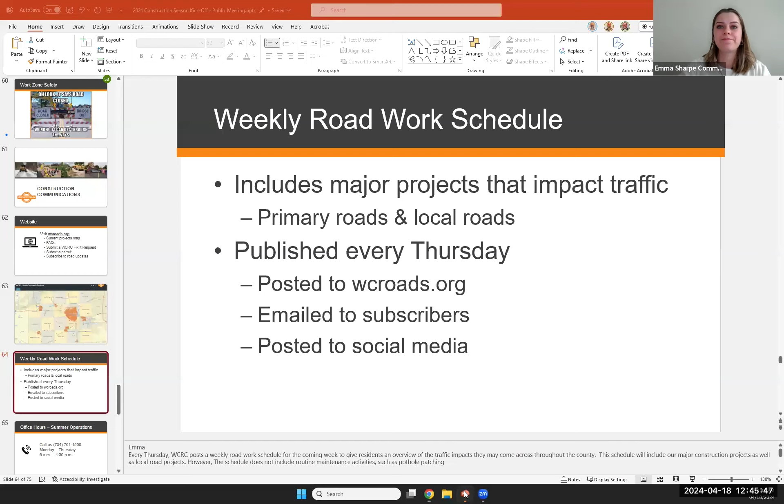As I stated before, the schedule is updated every Thursday. So by the end of the day today, this will be the schedule for next week between April 22nd through the 28th. You can click on these hyperlinks here and go straight to the project webpage. They'll have detour maps and the contact information for the project manager. Okay.

Okay, so our hours of operation during the summer and spring are Monday through Thursday from 6 a.m. to 4:30. During the winter hours, it's from 7 a.m. to 3:30, Monday through Friday. But beginning today, we will have our office hours from Monday through Thursday from 6 a.m. to 4:30. If you see a hazard on the roadway during these times or even after office hours, please feel free to give us a call. We have an after hours answering service that will help us facilitate handling those hazards on the roadway.

How can you report an issue to WCRC? Through our WCRC Fix-It request ticket system. So we've got a request ticket system that allows residents to submit requests to us. Our foreman and our operations crews or engineering team reviews these requests and then provides answers to our residents. Residents can visit our website or download the WCRC Fix-It app, and they can submit tickets for issues such as potholes that need to be filled, tree trimmings, drainage concerns, damaged mailbox, or neighborhood traffic concerns.

If residents choose to, they can attach their contact information to the request ticket that they're entering, and that way they can receive status updates regarding the ticket that they've entered. However, if you see a hazard such as an object obstructing the road or a down or missing stop sign, definitely feel free to call us and do not submit a ticket. That's an emergency that we want to address as soon as possible.